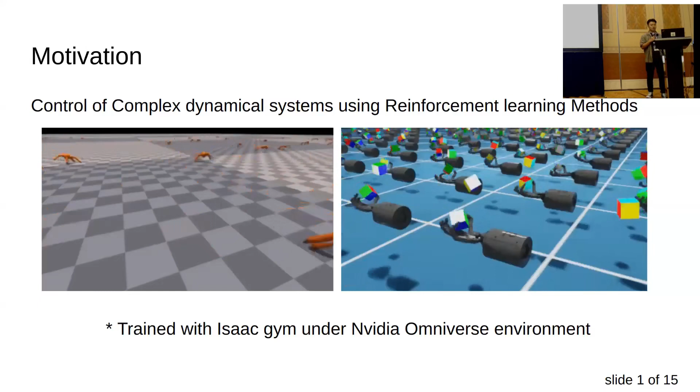And for why are reinforcement learning methods so popular among robotic control? I think we can find some hints within the definition of these terms. First of all, reinforcement learning is about letting an agent learn how to make decisions by interacting with an environment and have feedback in the form of reward functions.

And the control method we are using in this task can be categorized into optimal control. And optimal control is a method that optimizes a defined performance measurement, like normally a cost function. And our method here, reinforcement learning plus optimal control, can create an adaptive system that can have the advantage of reinforcement learning agents and, of course, the optimal control methods.

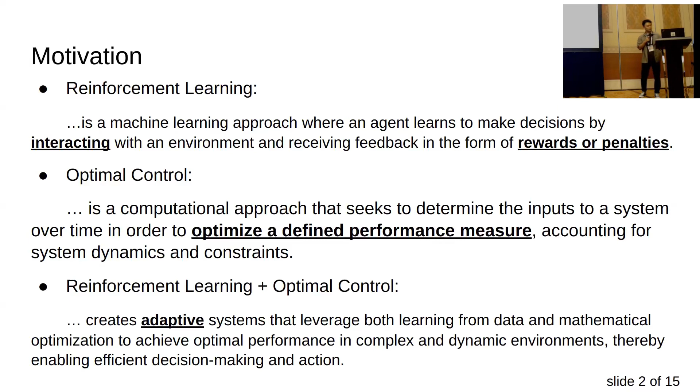Then I want to talk about my methodology, which is SAC plus LQR. SAC is for swing up and LQR is for stabilization around the goal point. And first of all, I want to explain a little bit about SAC. Because SAC is a very basic reinforcement learning method, I won't talk about too many details for this. SAC is short for Soft Actor Critic. I want to talk about the Actor Critic structure first.

Actor Critic is a structure that separates decision making and value estimation into two networks. The actor part has to do with taking the action after evaluation of the value, and the critic has to evaluate whether the action taken by the actor is good or not.

And the soft part in the SAC algorithm is called entropy regularization. Entropy is a word which describes how random a random variable is. And entropy regularization here refers to adding a bonus reward every time in accordance to how random that policy is. And this is a deep reinforcement learning method which uses neural networks for the actor and critic part, and is also model-free.

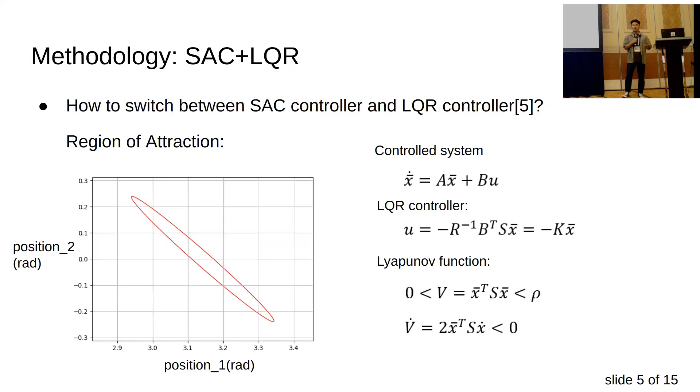And here comes the reward shaping problem. Regarding the reinforcement learning method, we designed a 3-stage reward system. The first is a quadratic reward function on position, velocity, and torque. It is very similar to an LQR controller, and we penalize the position difference, the velocity difference, and torque usage. And I want to talk about the third reward first, which is when the agent reaches the ROA of the LQR controller, we give a handsome reward.

Because this is the ultimate goal of our system, to let it swing up to enter the LQR ROA area so it can be caught by the LQR controller, we give a very handsome reward, something like 1E5. And because it cannot learn to reach the ROA of the LQR controller during the learning process, we add a second level reward, which is when the agent swings up above a certain line, we give a certain level, so it fills the gap between the first level and the third level of the reward function. So it can learn to reach the ROA on its own during the learning process.

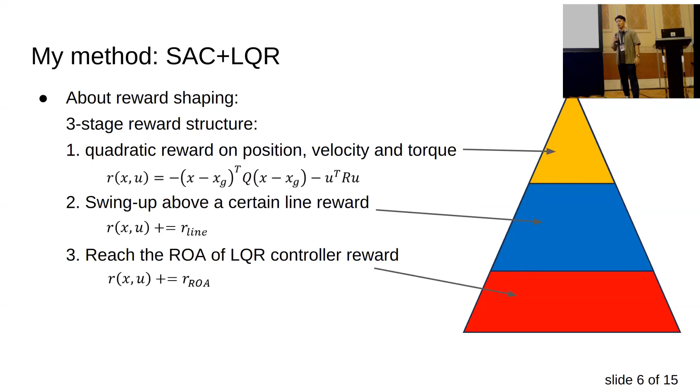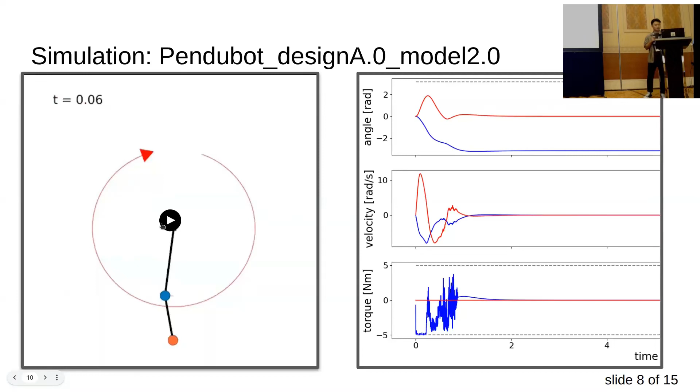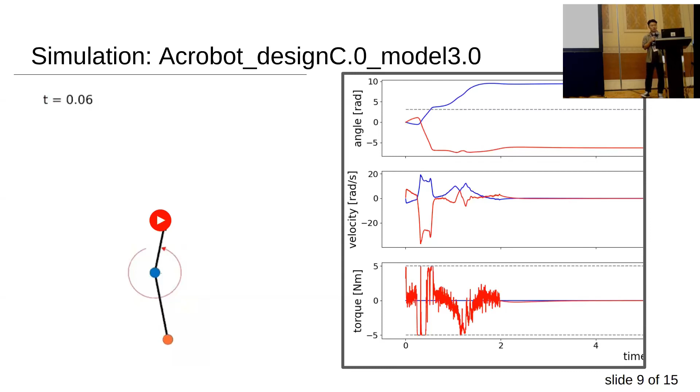Now let's talk about the real system. When we are transferring from simulation to the real system, a lot of problems happen. What makes the real system more complicated? I have found these problems. First of all is time delay, because there is always a connection problem between the controller and the real system, which is the motors. And I measured the time delay in this case as about 0.015 seconds.

Time delay is very lethal in this problem, because if we have a larger time delay, it will harm the very basic idea of reinforcement learning, which is a Markov chain. If we don't have the Markov property, the reinforcement learning algorithm doesn't work. And there is a torque tracking problem, because we're using a control frequency of 400 Hertz, and the control frequency is high, so the torque tracking is only around 80%.

For example, if I give it 5 Newton meters, it can only reach 4 Newton meters in the given time. And there is, of course, always going to be a model uncertainty problem and other disturbances, for example, friction. Other challenges posed on our training process are the competition rules, because the velocity has to be under 20 rad per second, and the position has to be under 2 pi, which means we cannot do a swing up like I showed you in the Acrobot simulation. It has to swing and go back, like this. It cannot do like this.

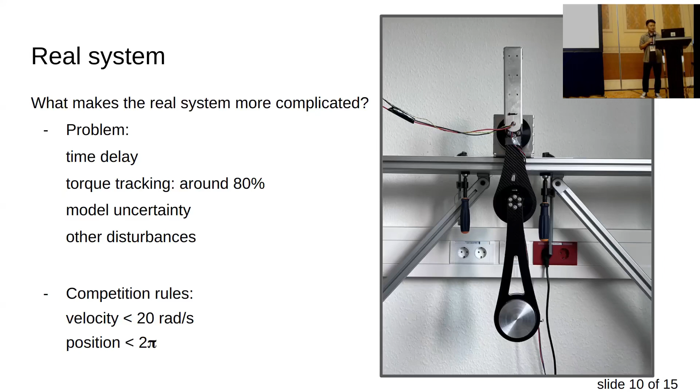Before I show you the successful version on the real system, I want to show you how I transferred from the simulation phase to the real system phase. We use a checking environment, which is a noisy simulation. We make the noisy simulation as close to the real system as it can be: we add the time delay, we add the torque responsiveness, we add friction compensation, and every time we train a new model in the simulation phase, we check it in the noisy simulation. If it works, it's ready for transferring into the real system. If not, we have to go back and change and tune things until it is suitable for the noisy simulation.

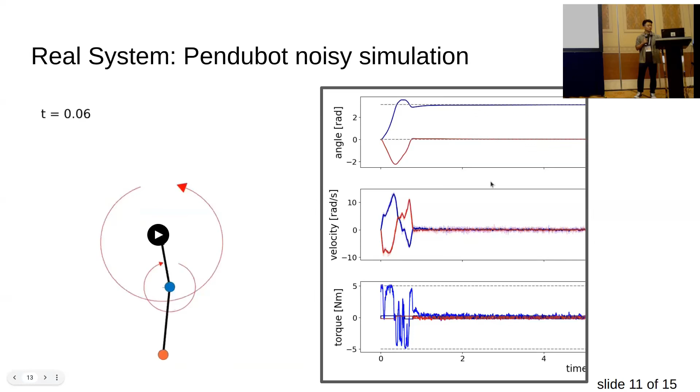Here is the field test for Pendubot swing up and stabilization, which is successful this time. As you can see, it swings up within the 2 pi limits and within 20 rad per second. However, the LQR catches, but it doesn't stabilize so perfectly like in the noisy simulation, which indicates there is still some difference between the noisy simulation and the real world system. The success rate of the system is 40%, 4 out of 10.

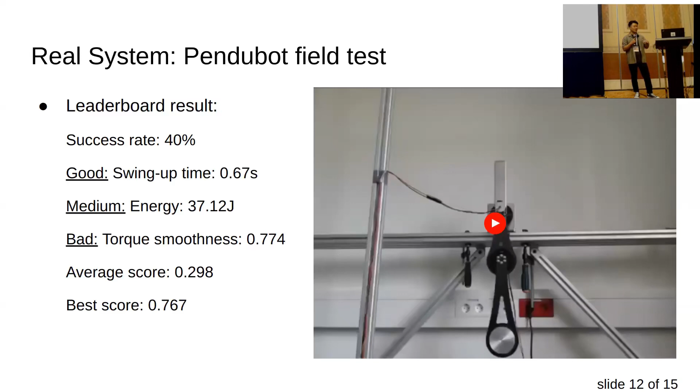There are three criteria I can talk about: one good thing, one medium thing, and one bad thing. The good thing is the swing up time for the Pendubot is very impressive, 0.67 seconds, within the 20 rad per second speed limit, which is really fascinating. One satisfying criterion is the energy consumption, 37.12 J, which is in the middle of the leaderboard results. One bad thing is torque smoothness, which I mentioned multiple times before. It's 0.774, which is not that good. The average score of my system is 0.298 because of only a 40% success rate. The best score is 0.767. If this could stay successful all the time, it would be a good result, but it cannot.

About future work, the first priority has to be improving the success rate of Pendubot swing up and stabilization. One thing we would like to try is to penalize torque smoothness. The current idea is to use the torque as an input, as part of the state space, to train on that and penalize it, and maybe use acceleration as part of the state space too. And of course, Pendubot is only part of the task. We would like to accomplish successful swing up and stabilization for Acrobot as well, following the path we have now. Though Acrobot is a little more difficult than Pendubot, I think it won't be any problem to achieve that.

And of course, I want to try some model-based reinforcement learning methods, because model-based RL methods have certain advantages. For example, they require fewer episodes to do the learning, whereas we need 1E6, 1E7 time steps and countless episodes to achieve a workable policy. The goal of our task is to compare the performance of model-free and model-based reinforcement learning and to summarize the advantages and disadvantages of these two methods, especially in robotic control.